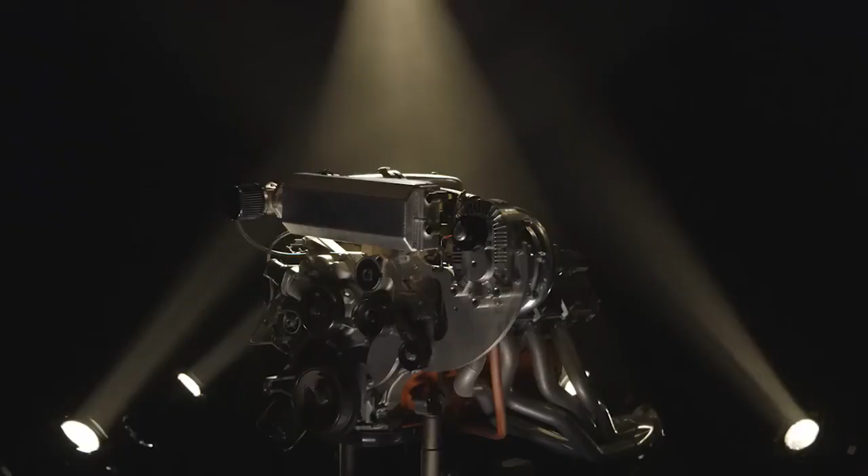This episode has all the BAM. It's Engine Masters presented by AMSOIL and our very first head-to-head showdown between two engines. This one, a big block Mopar 383, and that, a small block Chevy 383. Now, when you're doing a shootout like this, you really need to eliminate as many variables as possible so that you've got a fair fight.

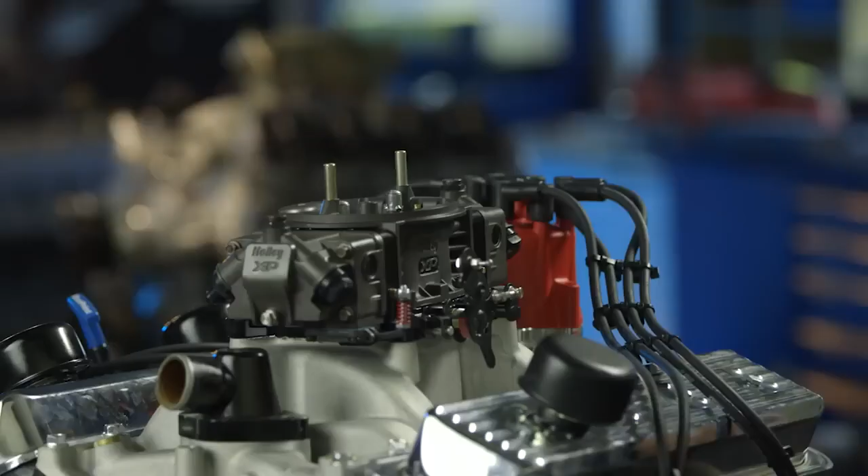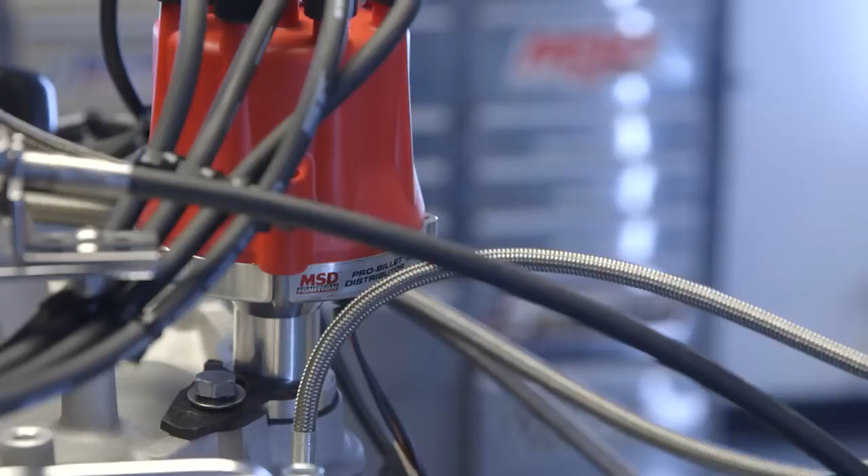So as I'm going through the tech specs on this Chevy 383, I'm going to tell you about some of the components that are going to be the same on the Mopar as they are on the Chevy, starting with this carburetor. This is my favorite carburetor right now. This is a Holley XP. It's an 850 CFM double pumper. It's an aluminum carburetor. They've got new calibrations in it. It's got features like the billet metering blocks and a billet base plate, and I want to take it home and play with it.

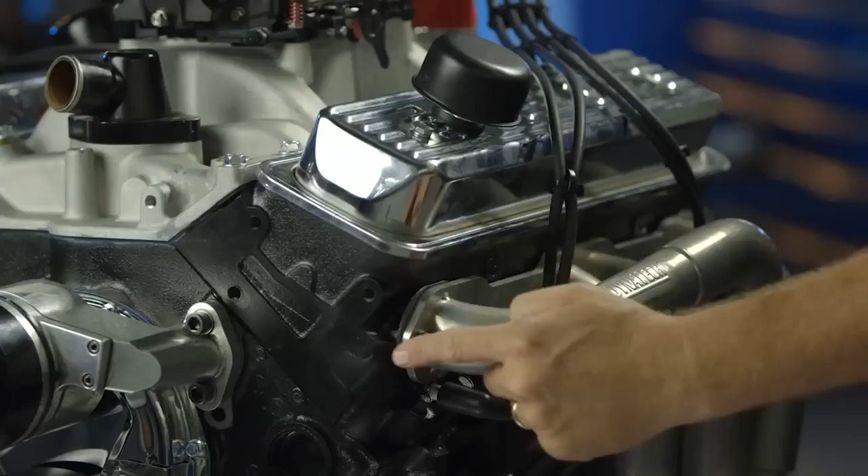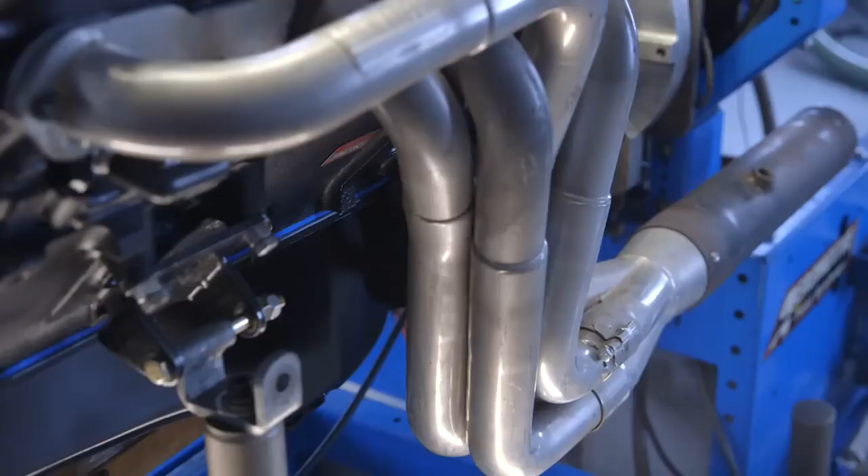The MSD distributor is also going to be used in both engines, as is a high-rise dual-plane intake manifold. Now, one of the rules was that you had to use the best possible iron production cylinder head to eliminate the variables of the aftermarket. This is a Vortec head, kind of what you'd find on a 350 Chevy and a 90s Chevy truck. It's got the best port and best chamber that I know of for any production cylinder head on a small block Chevy. The 383 Mopar will take a 1 7/8 diameter header. The small block Chevy can't accept that bolt pattern without an adapter. So this is a 1 3/4 to 1 7/8 inch stepped header.

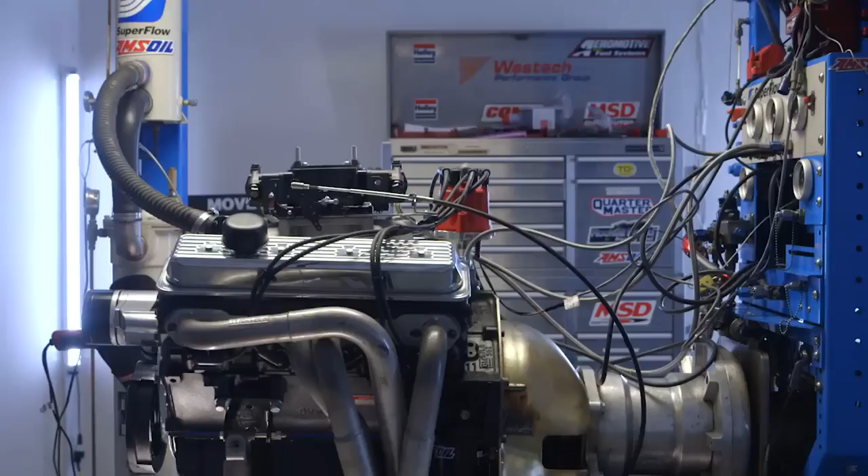Getting into the short block, let's talk about the camshaft. Both of them are running the same Xtreme Energy Comp Cams hydraulic roller. They are a 230, 236 at 50 grind. This one has 510, 520 lift and a 110 lobe separation angle. The compression ratio on both these engines is 9.6 to 1, and now we start getting into a little bit of a difference. The Chevy 383 is a stroker motor, which means that the crankshaft stroke is longer than stock. This is a 350 block with a 4.04 inch bore, and the stroke is 3.75 inch.

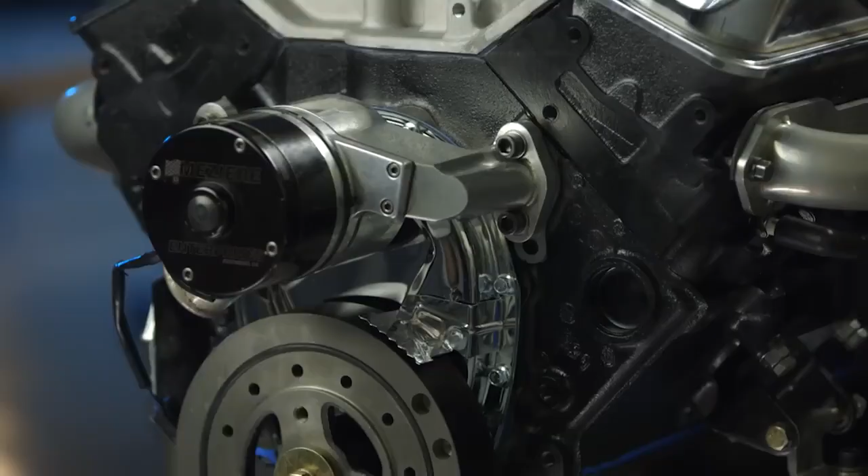They advertise this at 420 horsepower and 440 pound-feet of torque, but we're gonna find out if that's true right now.

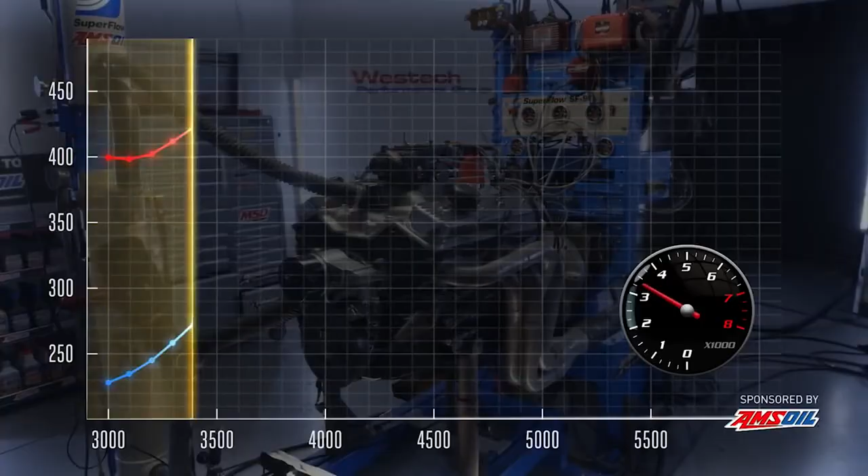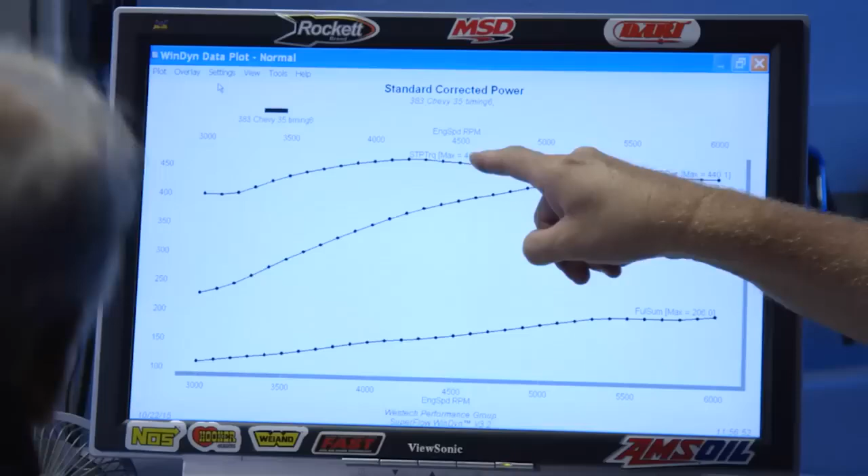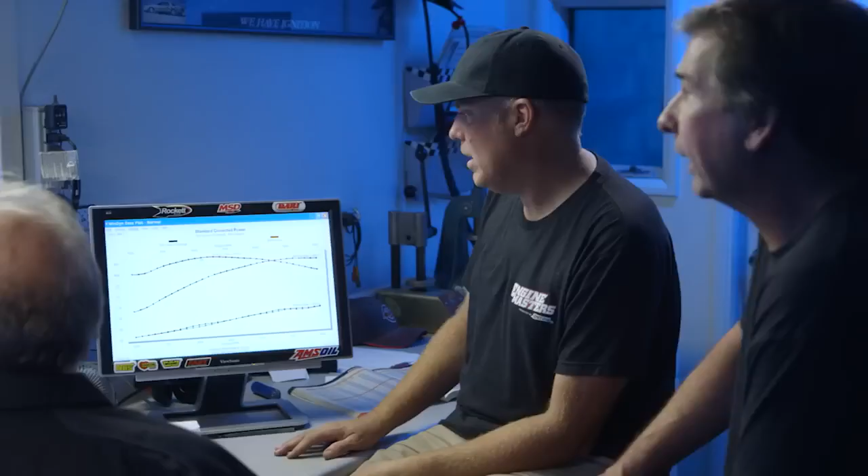And in the end, we've got 465 pound-feet of torque and 440 horsepower. And how repeatable is it when you can just do that over and over and over? It's pretty good. That's a really nice motor. Yeah, it is. I have to say, I'm going to have a hard time beating this with my Mopar motor. What? I'm not hedging here. It's a big block. Here, let's go install it. I want to find out.

Man, Blueprint Engines over-delivered as usual with that Chevy 383. That thing made good power, and this poor Mopar has an uphill battle. It's clearly the underdog in this fight, and this thing was built at home by Steve Dulcich literally at 2 o'clock in the morning just days ago. Let's go through the specs on this thing again.

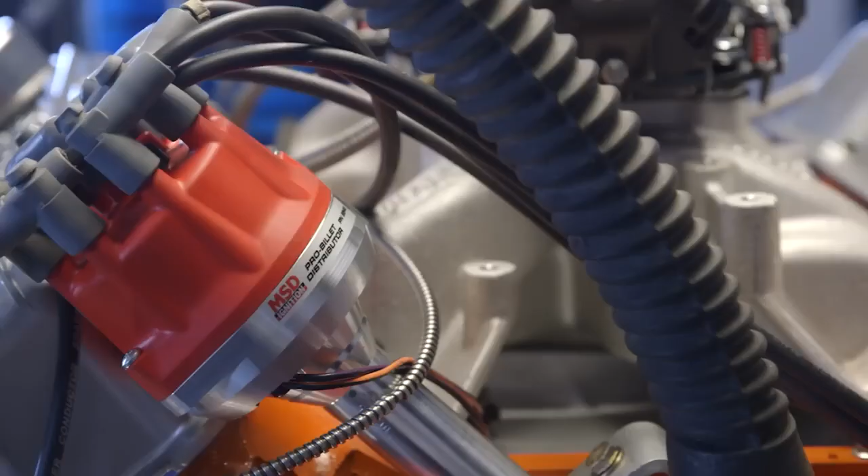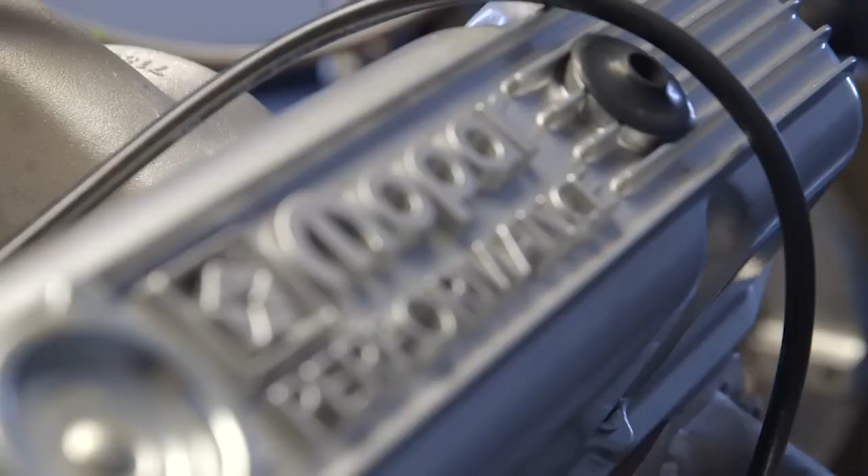Same carburetor as the 383 Chevy, that 850 Holley XP. Same MSD ignition. This is an Edelbrock RPM dual plane intake manifold like the high-rise on the other one. This is 9.6 to 1, just like the Chevy. This engine has the same Comp Cams 230-236 duration hydraulic roller as the Chevy, but the Mopar grind has a little bit more lift. It's 0.541 inches on the intake and 0.537 on the exhaust.

Now the bore and stroke on the 383 here is wildly different than it is on the Chevy. And so what makes up the displacement? The bore. This thing has a factory bore of 4.250, and this thing is 60 over, making it 4.310 inches. And if you do the math, the total displacement on this thing is 394.

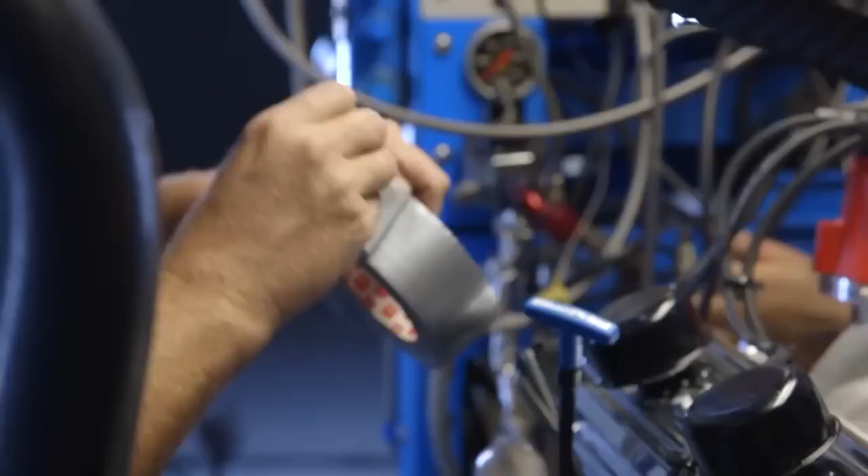But really the coolest thing about all of this is that Dulcich is sweating bullets. He seriously wants this garbage to win. Let's go find out if we're gonna make his dreams come true or squash him like a roach. Boom, boom, boom. Oh yeah. I'm actually stoked on this. I hope it wins. I don't think it's going to, but I hope it wins.

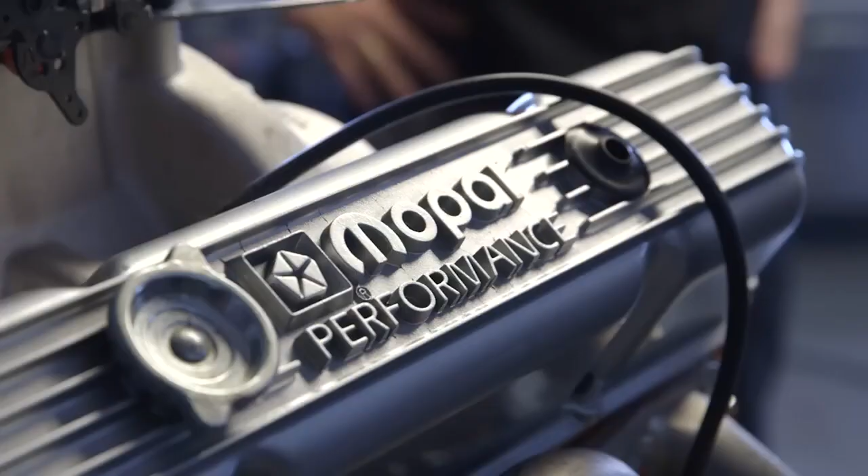Here's why I think this thing actually has a fighting chance, okay? I gotta hear this one. Okay, so it's 10 more cubic inches. It has a taller deck height, so the intake manifold is bigger for more plenum volume, and has longer runners, so it stands to make more torque. And the under-chassis header design is a longer tube, so it stands to make more torque. So I think that's why it has potential, and if it doesn't win, it's Dulcich's fault. Why is it my fault? Because then you did something to overcome all those advantages and lose anyway.

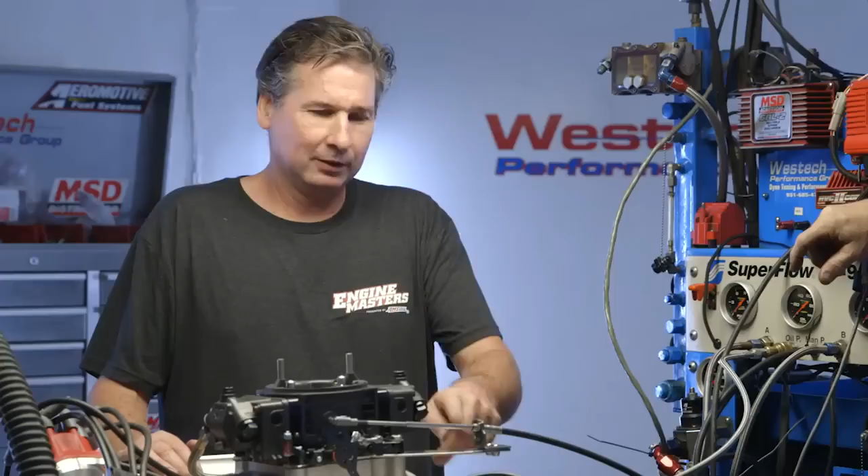These are rated at 335 horsepower. Freiberger, would you agree that there's no more famous big block Mopar factory head than the coveted 906? Oh, I know, that's why all the Mopar guys are gonna absolutely hate us and rip us to shreds, because that's the single best cylinder head ever manufactured. This is the Edelbrock RPM. It's the best manifold for this kind of engine combination. I've got the MSD distributor. I've got the TTI headers with not a single ding or dent anywhere. These heads are milled to equalize the compression to make it the same as yours.

There's one way to figure this deal out. So right now, you're saying legitimately, no facetious comedy, you think it's gonna win. Well, look at it. It's got this happy orange paint. It looks good, friendly, and comfortable. Still facetious. You say absolutely no chance whatsoever? I say no chance. I say there's a possibility that it makes more torque, but not horsepower. I say there's absolutely zero possibility that that Chevy is going to beat this Mopar.

I'm a little nervous. I'd like an opportunity to recuperate my prior wager. Now this is your motor. You've built hundreds of these things. I slammed that together in one afternoon. That would be your problem. But you built hundreds of these, and I think that you should maybe have a little better idea of where it's going than we do. So I'm willing to take a chance and offer a little wager one more time. Really? I really am. Oh, I don't have the confidence in my numbers for that. All right. That's why they call it gambling. I know. All right, I'm in. Okay. What are we gambling for? You're realistic. I'm the balance of hopeful and realistic, and you're just hopeful. I've got my 20.

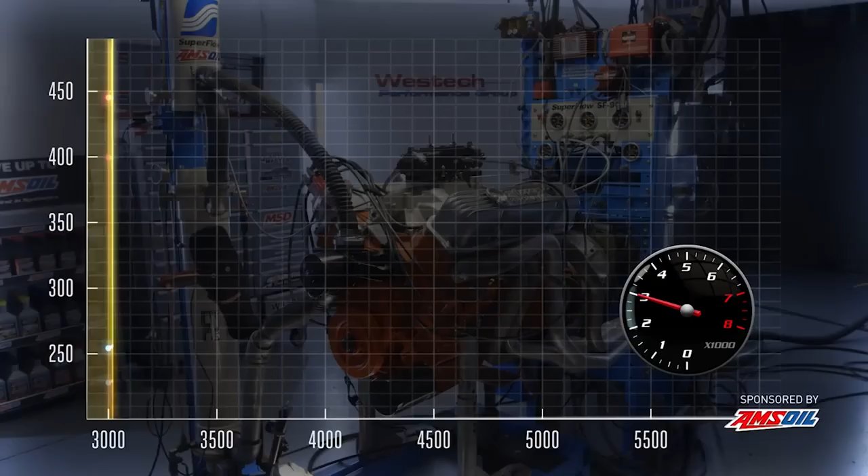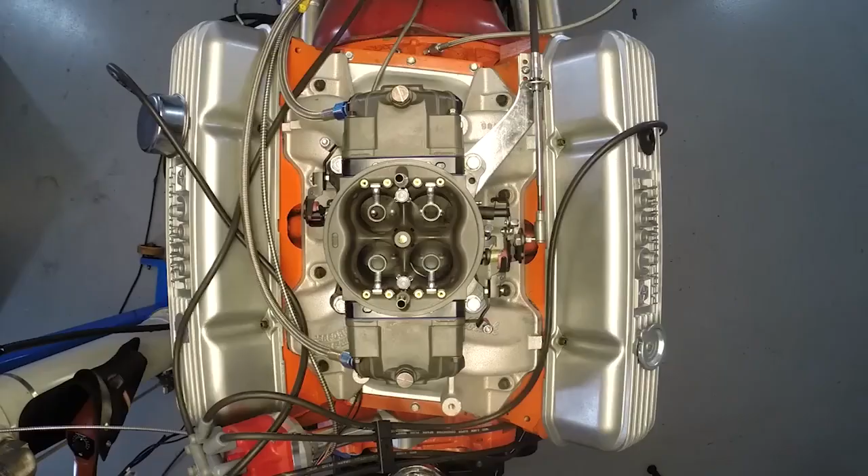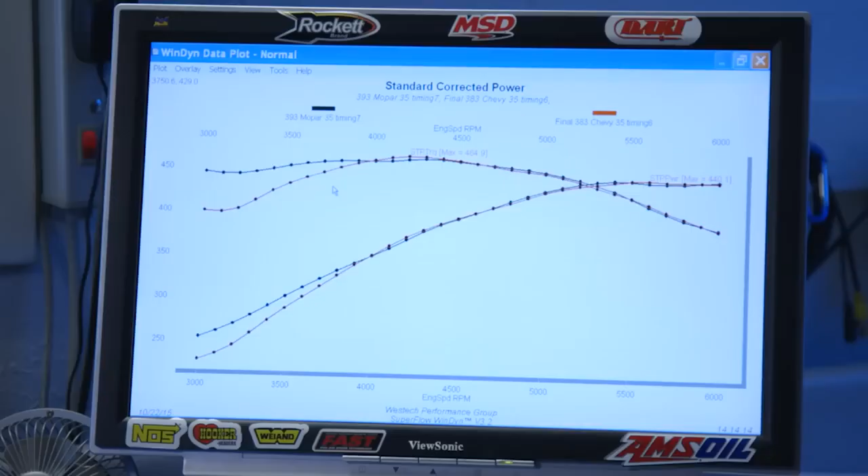Wow. Here's what just happened. That was the very first dyno pull that we made with the 383 Mopar, and it was a legit nail biter. I didn't know what was gonna happen. We were all guessing. Dulcich had high hopes, but look at this. From 4,000 RPM on up, almost exactly the same curve between these two engines. But the Mopar kills the Chevy here between 3,000 and 3,800 or something like that. Just a whole lot more torque and horsepower. And we have to give more credit to the cylinder head on the Mopar than we did. It must be in the same neighborhood as that Vortec head, or it would not have repeated the same power like that.

I had 453 at 4,300 for torque. Okay. And 427 at 5,500 for power. Okay. I had 458 at 4,300 for torque and 428 at 5,600 for power. You'd almost think we'd done this before. 475 pound-feet and 485 horsepower? I was being optimistic. Oh yeah. Freiberger, you take home the dough.

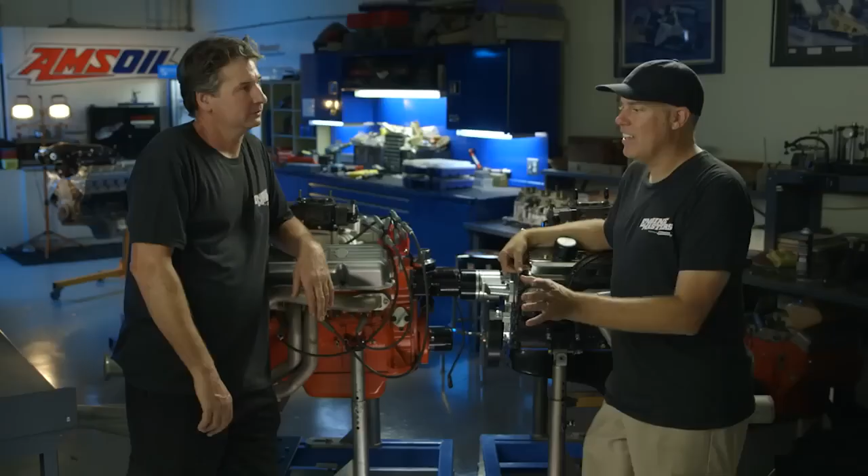Yep. That was seriously my favorite episode yet. I got to say, I liked it a lot too. Because of winning. Yeah, because this thing did what it needed to do. So what can I say? The thing I like about it is that it was pretty legit. I think we went to a lot of effort to make sure that these things were sort of equalized. And what are people going to rip us apart on the internet about on this? Well, I don't know. All I know is I had no idea how it was going to play out until it actually happened in the cell. Oh, I know. And it couldn't have turned out any better for me because this was an unknown quantity until we tested it. Yeah, this was really predictable. I mean, Blueprint knows what it does. We kind of knew what was going to happen, but that was the wild card, and you dominated. It was pretty cool. I literally slammed that thing together until 2 o'clock in the morning, the night before we had to be here. Oh, I know. It was genius. No, I really liked it. That was a good show.